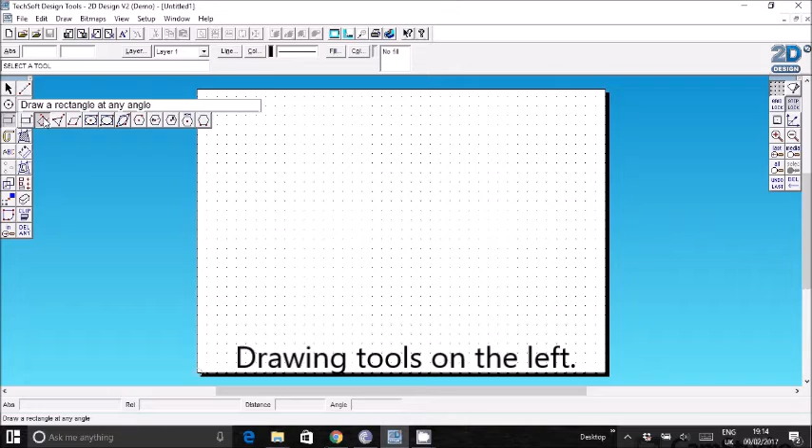Just some things I want to point out first on 2D design. On the left here is a group of drawing tools, and what you can do is you can click and then hold down, and that brings up multiple options. So for example, these are shapes. These are lines, click and hold, different ways of doing lines. This is the delete command. So most of your drawing tools are over here on the left. Over here you've got some other tools that will help you navigate.

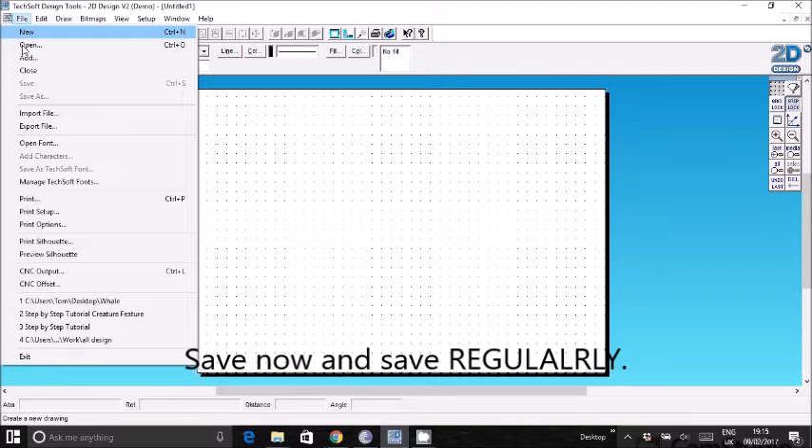Now once you've opened 2D design, it's a good idea to save your work immediately. So if you go File, Save As, and then ask where you should save your work. Okay, and you need to save regularly. Right, you've got these dots on the screen. This is your grid, and this will help you work more accurately because these are very evenly spaced.

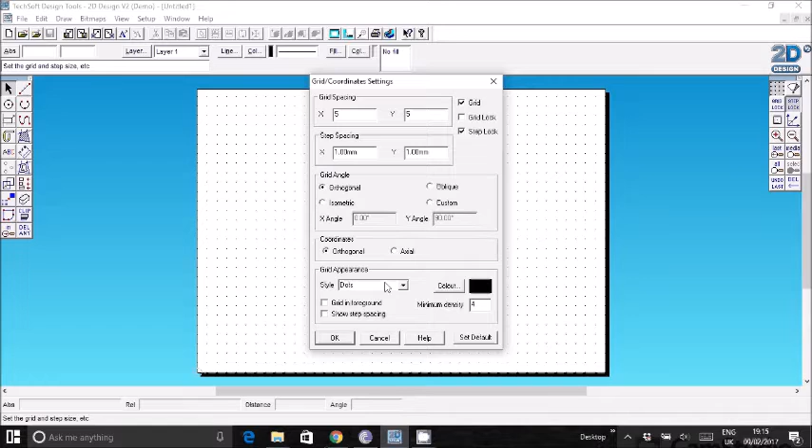Now I want to get these dots closer together. That will help me work more accurately. So the first thing you need to do is go up here to grid and double click on that. Okay, and now you're going to change the grid spacing to 5mm and 5mm, and then click OK. Now watch the dots. So they get closer together.

Excellent. Right, you also need to have grid lock on. Grid lock means that if I draw something, let's say a rectangle shape, notice that my cursor is jumping to the dots, so I know that's a very specific size. Okay, now you need to first of all draw a rectangle the size of your phone. So I'm going to give you some measurements to do.

Right, you click on shapes, and we want the first one, which is rectangle. See, you got all these options. You're going to click on the first one, rectangle. As I draw the rectangle, I want you to watch these numbers down here. See, it says rel. Yeah, watch these numbers change. So I click around here, click and then drag. You'll notice the numbers down here have changed.

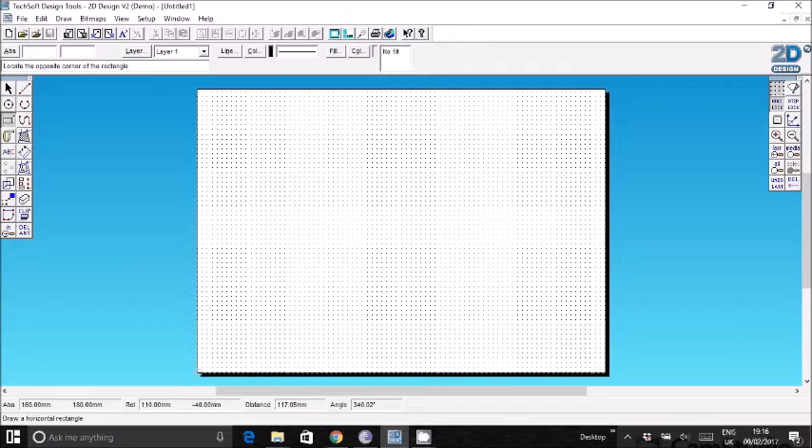Watch, and I want it to be 135 and minus 70. 135 and minus 70. That is exactly the size of my phone. So I'm going to click again now, and I've got the size of my phone.

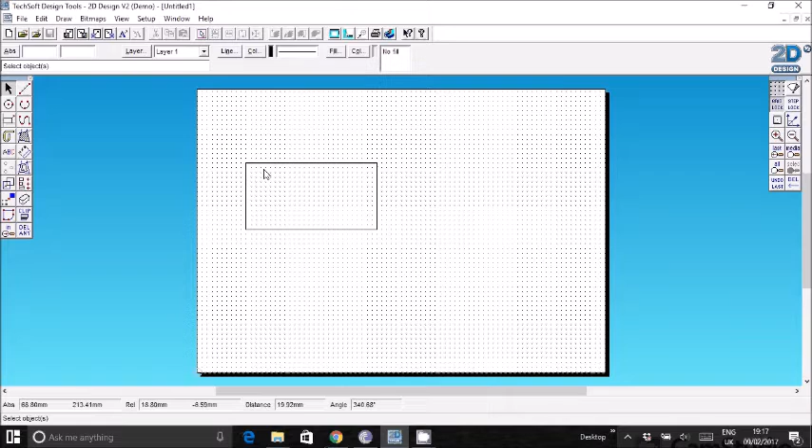Now you want the window of your phone holder to be slightly smaller. So to make a window slightly smaller than that of the phone, you need to click on this contour. So click contour, and then click 2mm. Erase that and just put 2, and then click OK. Now if I click just inside my rectangle here, there we go. That now is the window slightly smaller than my phone.

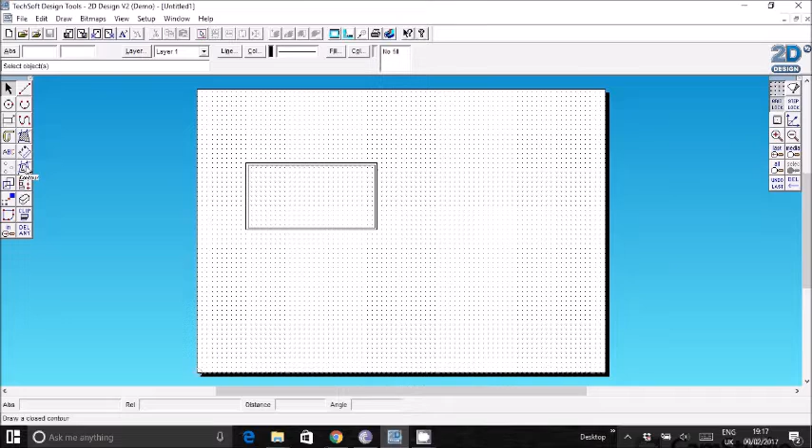Now I want to have a frame around it, so I'm going to contour again. Double click on contour, and we need to change this spacing to 15mm now, and then click OK. And again just click slightly outside the rectangle, and now we've got the window, the size of my phone, and the frame. What I'm going to do is just delete the phone now. So if I click delete any, that option, I'll just click on that. It's gone, and I've got my window and my frame.

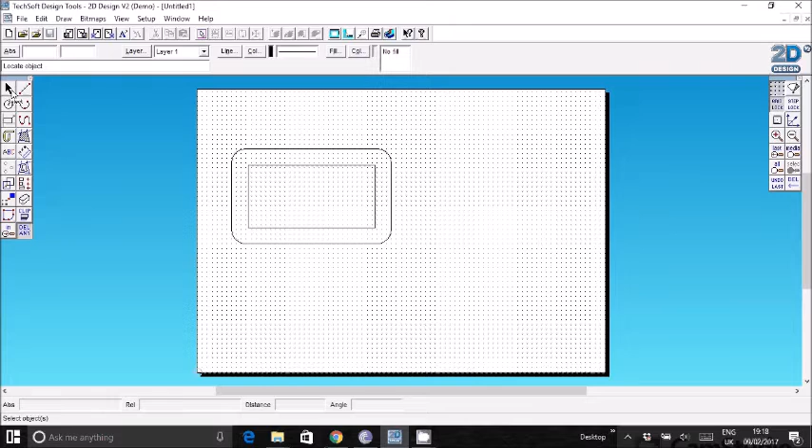Okay, it's a good idea to save now. So file and then save, or you can also click on this save icon here. Right, I'm going to move this now. If I drag over that, okay, you've got these yellow dots. This allows you to change the size. Okay, now I don't want that. If you make a mistake like that, you can just go edit, undo. So you can undo one mistake.

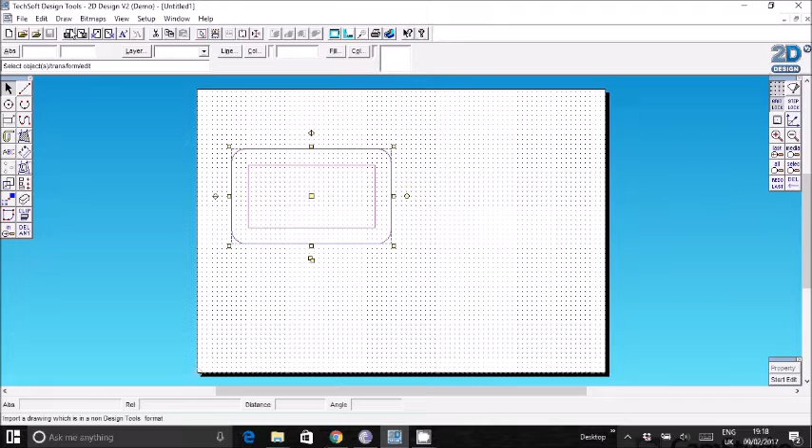What I want to do is click on this center yellow square and move it just about here, because you try and work from the top left corner.

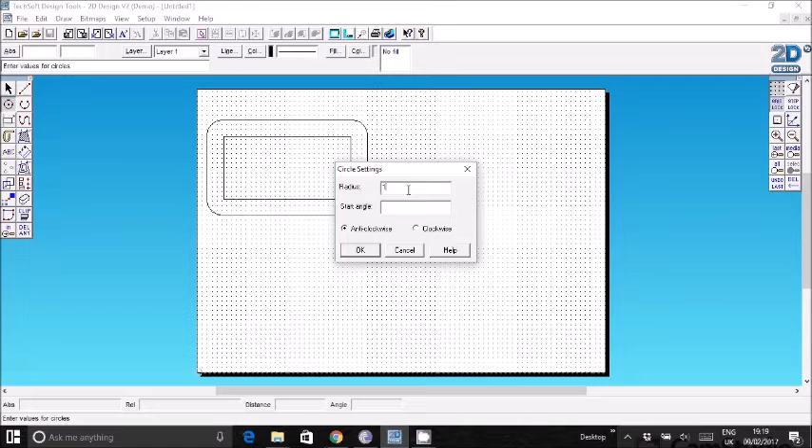Right, next step, I want to add an aerial to my TV. Now the way to do that is to first make a circle. So if you double click on circle, and I want you to set a radius of let's say 15 millimeters, that is radius, and then click OK.

Then you've got that circle. I want you to place it approximately there, and then click again. Right, now I'm going to delete these lines I don't want. So to do that, I click on delete any, hold it down, and then select this second option here.

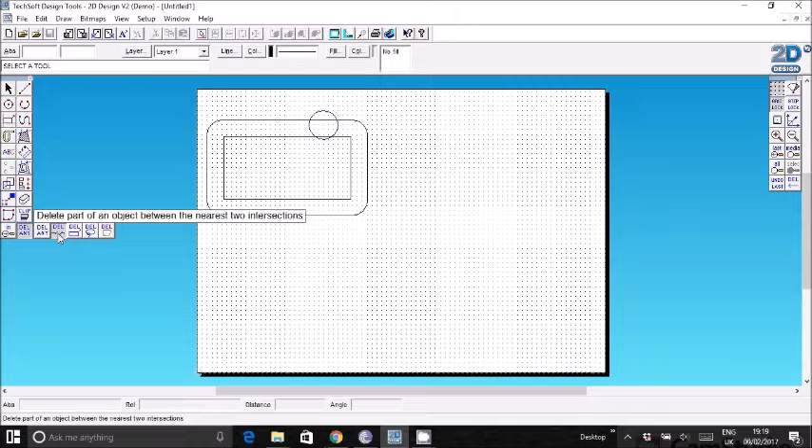Now if I zoom in using this tool here, zoom, scroll up and across, I can delete these lines I don't want. I don't want that, don't want that, don't want that, I don't want that. Okay, great. I'm going to save that now, so you can click there, save, or file, save.

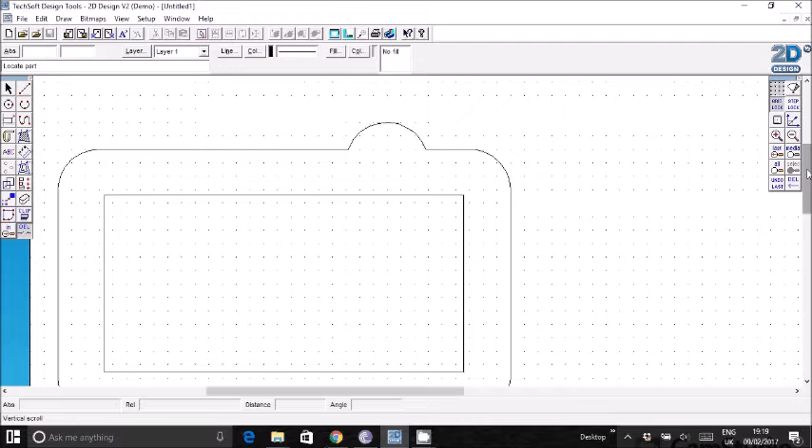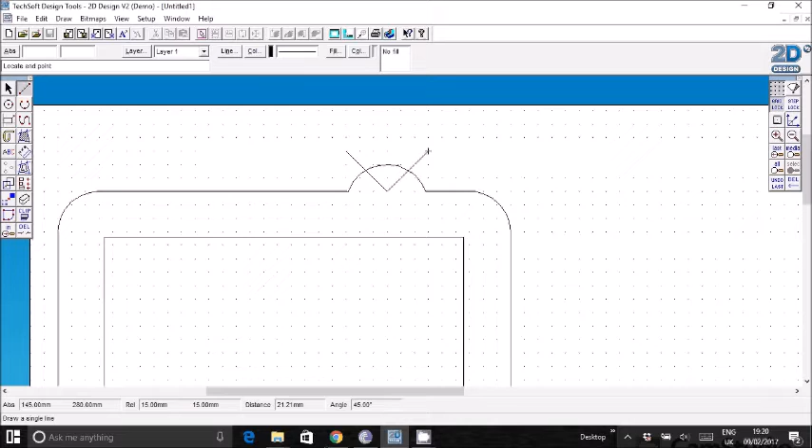Now I want to add the aerials just above, so what I can do is, if I click circle, oh no, before I do that, I'm going to have lines. Click line here, and I want a line coming out like this, let's say to that point, and I want a line coming out there to that point. Notice it's even, yeah, it's even.

Now I want some small circles on the end, so I'm going to click circle, and I click on the end of my line, and I'm just going to do it that size. And I'm also going to do one here, click and then click again. Now the laser cutter will just cut through that, and I don't want that, I need some thickness here.

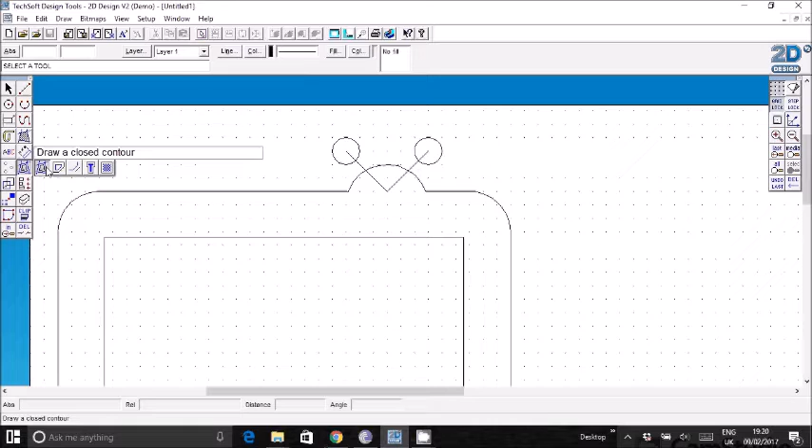So what I'm going to do is click contour, and this time I'm going to select this third option here. I'm going to change that spacing to 3mm. Let's see if that works. Now if I zoom in again, and then click this side of the line, and then that side of the line, I'll do the same here, there, and there. This is starting to take shape now.

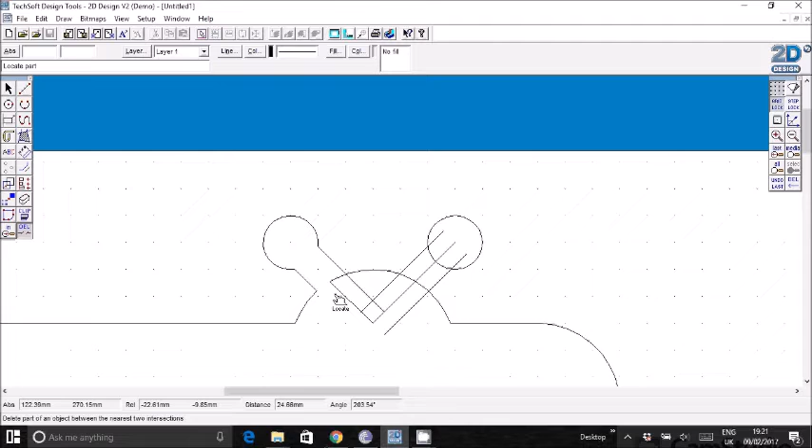And now I need to delete the lines I don't want. So I'm going to click delete any again, which is the delete part of an object, which is the second option here. I'm just going to delete all the lines I don't want, which is all of these. That one. Same over here. If you make a mistake, again, just edit, undo. Okay, I need to keep deleting.

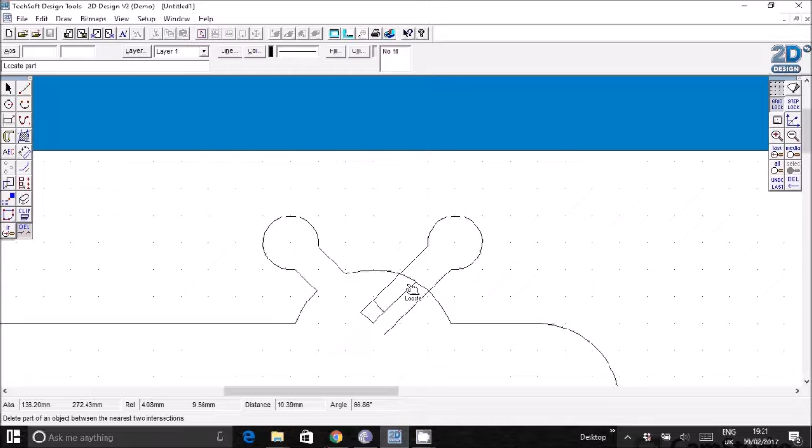Oops. And now for those items that are left, I'm just going to select them all and then delete. Press delete. Okay, if you zoom out, that kind of looks like a TV aerial, doesn't it? Right, good stuff. Now I want to add some feet to my TV.

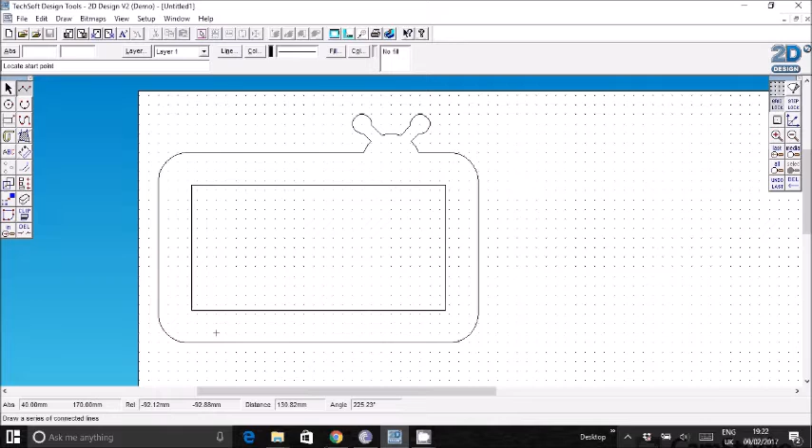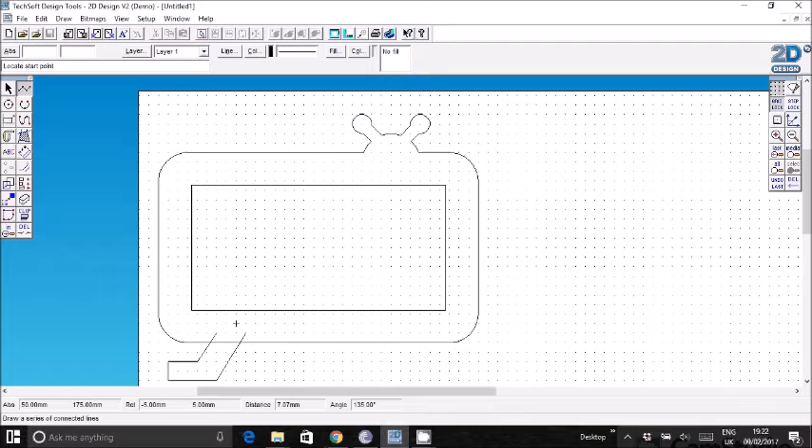So what I'm going to do is use the line tool. If you click line and then click this second option, draw a series of connected lines. What I'm going to do is start here, click, and then go down. And I'm going to keep drawing by clicking, like that. Okay, there's one foot. Now, if you've then still got this line selected, if you just right click, it finishes. Now I need to delete the bits I don't want again, so delete, delete, and delete.

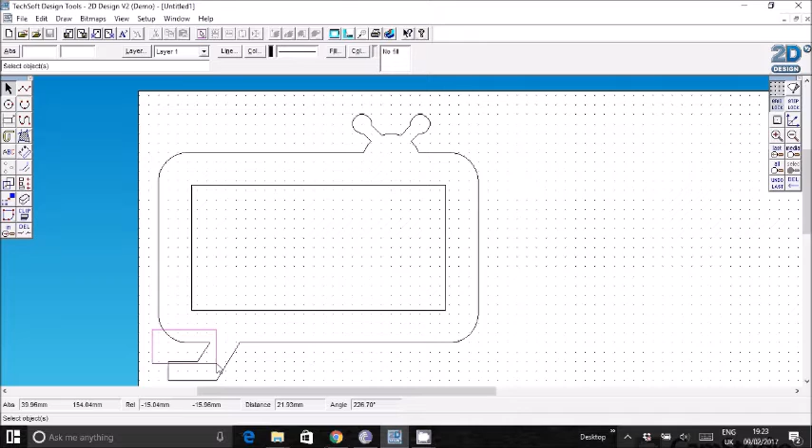Right, I've got that one foot, happy with that, but I want this replicated on the other side, and I want it to be exact. Now the way to do that, if I click that, the cursor, and then highlight everything, and then I do what we call mirror. So if you go draw, and then you go transform, and you click mirror, you're going to repeat, so click repeat.

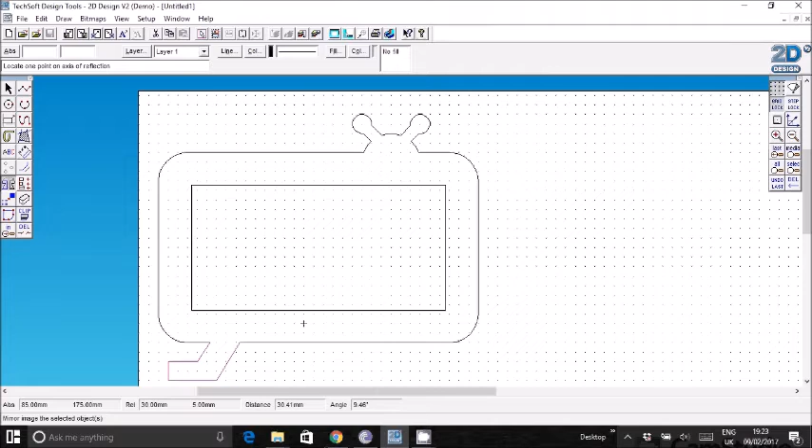Okay, now I need to draw a line, an imaginary mirror. So I'm going to imagine my mirror is probably about there, isn't it? Imagine that's my mirror. I click, boom. Right, that is exactly the same, but it needs to be further to the right. So I'm going to drag over everything again, and I click this center yellow, and I'm going to drag this to there. That looks better.

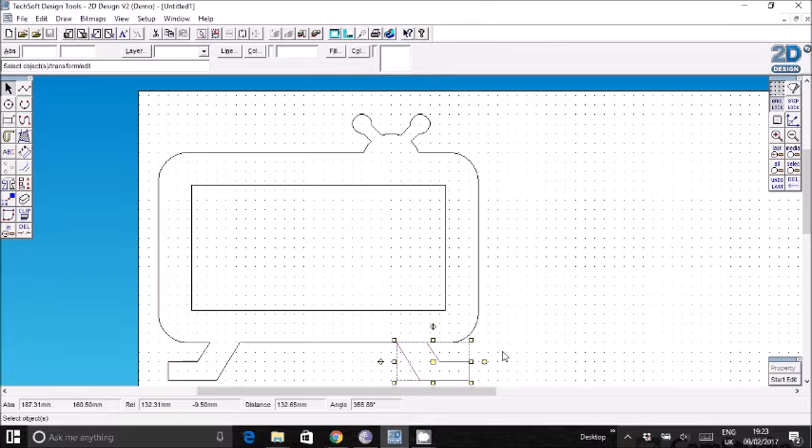Now the laser cutter will cut anything in black. So this bit here, if the laser cutter went through that, it would chop my foot off. So I just need to delete that little line there. Alright, good. Right, my frame is basically finished. I'm going to save that. File, save. Okay.

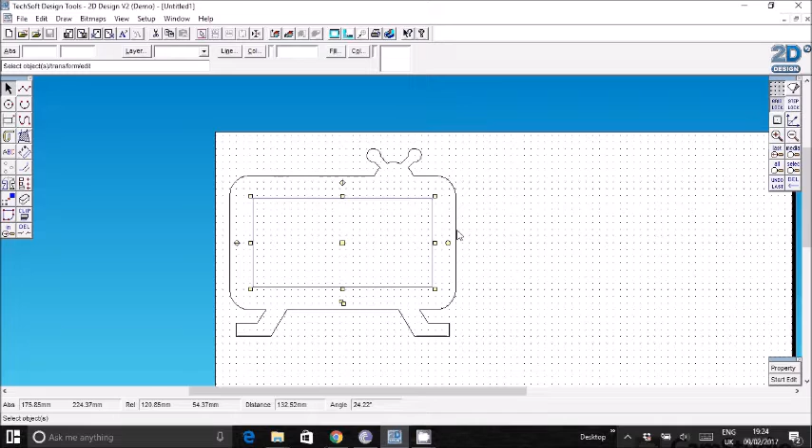And keep on saving. Now the next step, these are all a series of individual non-connected lines, and I want this to be one object. So what I'm going to do is drag over everything like that, and group them. You do that by clicking edit and then group. Okay, now if I click, it highlights everything.

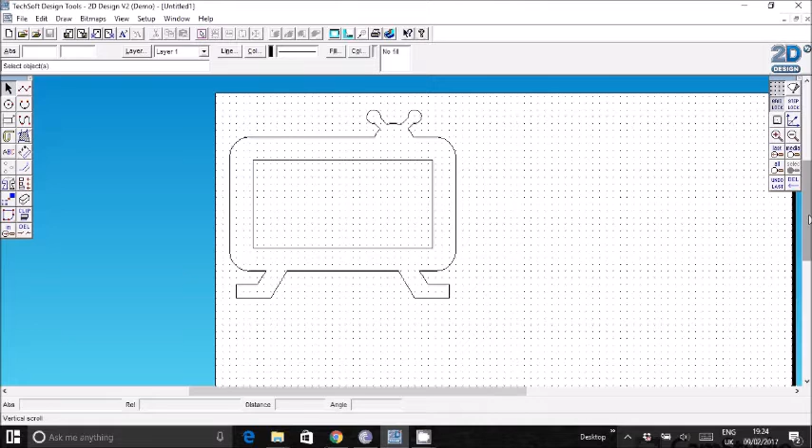Great, now that's the front of your phone holder. You also need a back. To make the back, click on the object, and down here you've got two yellow squares. Click that and it copies it. So I've got a copy, and I'm just going to click on the middle yellow square again and move this copy over here. Okay, so two exact replicas of the frame.

Now the back is half the height, so what you need to do is click a line. I'm going to draw a single line here, and across the middle I'm just going to click there and drag it across, click there. Now the back is only half the height and it doesn't have any detail, so what you need to do now is just delete anything above that line.

You also need to delete these internal bits. Okay, now if I click on that, I want to delete these top bits, but I want to keep this bottom bit, so I'm going to have to ungroup it. If I click on that and then edit and then ungroup, it's gone from one object to being a series of lines again.

So I'm going to select all of that and just delete, pressing the delete key to do that, and then if you select over everything, we're going to group that again. Edit, group. Okay, I'm going to save that, click here, or file save, and keep doing it regularly. So now I've got the frame and the back of my phone holder.

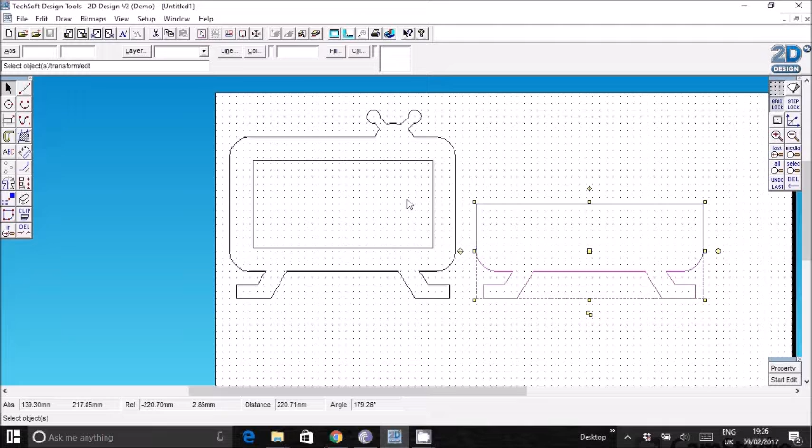Now the next thing you need to do is add some lines in the middle, because you need some sections which are going to keep the front and the back apart. To do that, you're going to click line, and draw across the bottom of your window here like that. Now if I zoom in,

you see these lines stick out. I don't want that, so I'm just going to delete part of this item here.

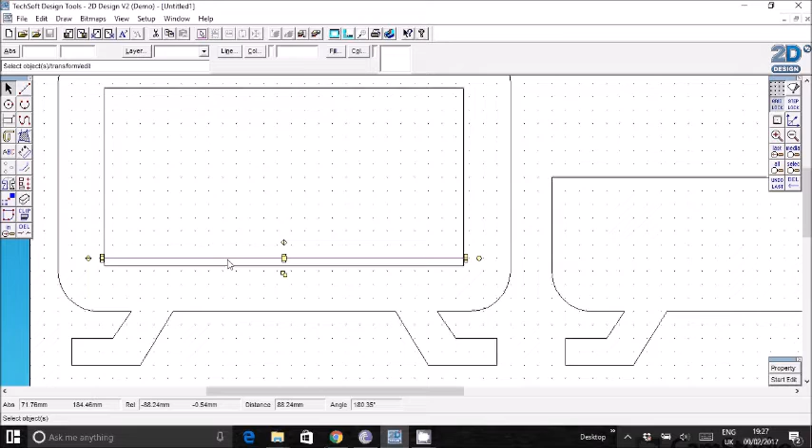Now I want to copy this multiple times, and they need to be evenly spaced. So what I'm going to do is click on that line, and there's a tool. If you go edit, then transform, and we're going to move/copy. Okay, move copy. Now I'm going to repeat this - let's try 6 times. So repeat 6 times and then click OK.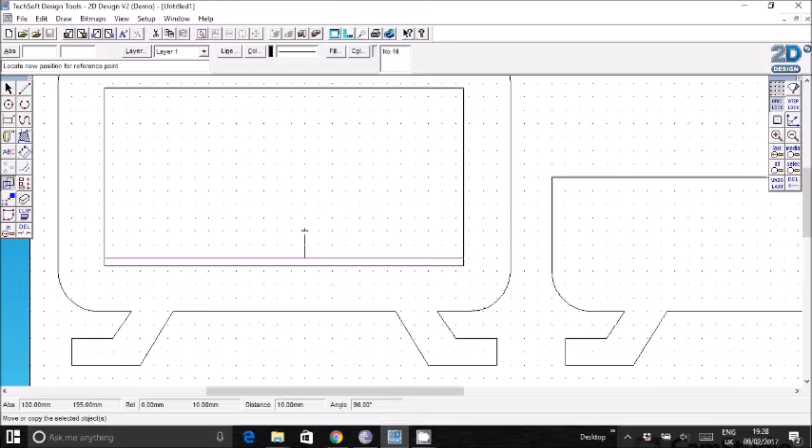Now if I click on the line, then move up, I'll go 2 dots, which is 10 millimeters, and then click again. It's duplicated that, and they're all evenly spaced, which is what I wanted. Okay, so a few of these will be the bottom section in between the front and back.

I also need some side pieces, so what I'm going to do is click on line again. Let's say if I count the dots here, well, I'm going to draw a line here first, like that. Now I'm going to count the dots. What do I need to do? No, I need to copy it again.

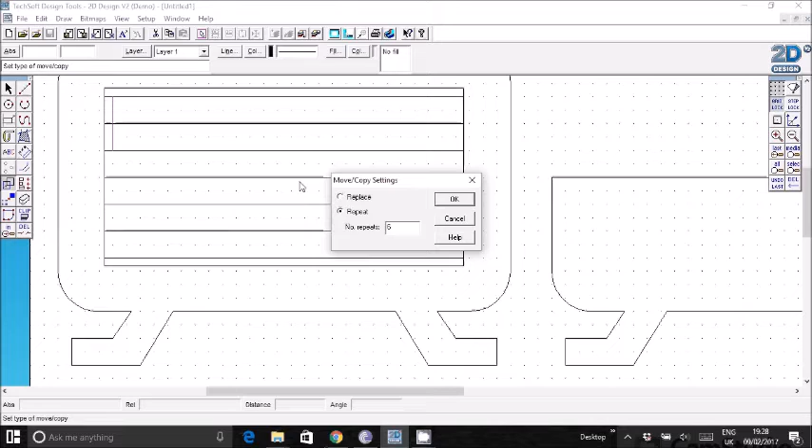So I click on this line, and then draw, transform, move copy again. And we're going to repeat it - let's try 6 times again. Now if I click on the line here, this time we're going to move it 1, 2, 3, 4 dots. Let's try 5 dots. Let's see what happens. Click.

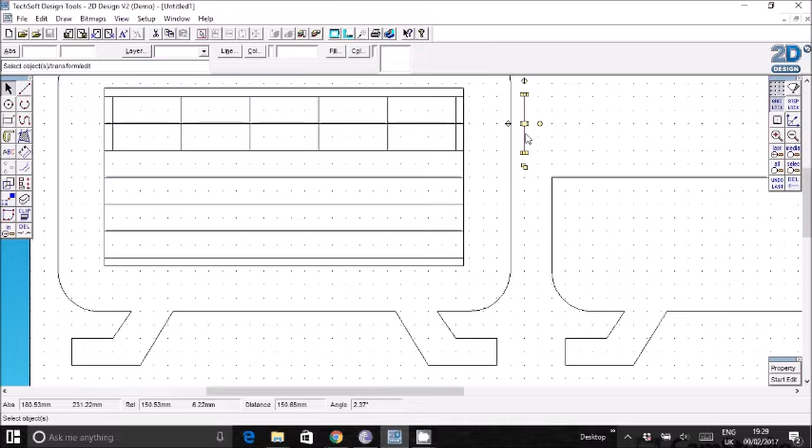Beautiful. Now I've got one line over here I don't want, so I'm just going to click on that and delete it. Now these will be my side pieces. Okay, let's zoom out again. Again, it's a good idea to save here. Beautiful, so I've got the front, the back, and these in between parts.

The last thing you need to do is add some triangles for the base, for the back of your phone holder. The way to do that, if you click on shapes, click and hold, and then select the triangle option.

Watch these rel numbers here, they'll tell you the size of the triangle you're drawing. So I click... escape, try again, give myself more space. You want it about 35mm down and about 30 across.

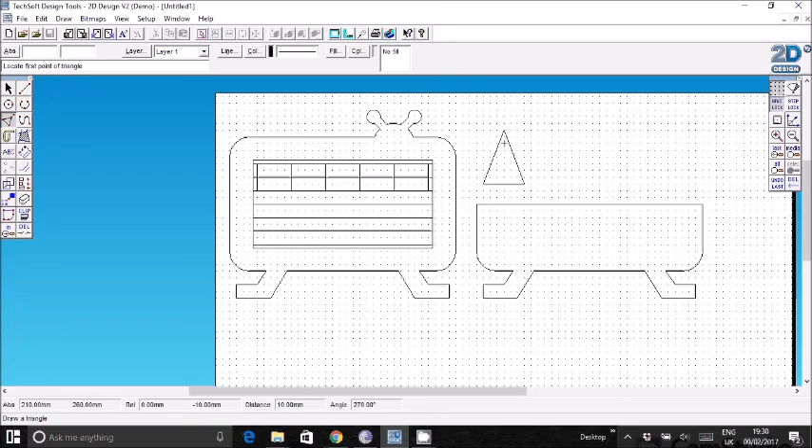Actually, let's make it bigger. Let's try 40 down. Oh, what am I doing? Once more, again looking at the rel numbers here. We'll go 40 down and to the side, and we're going to go 30 across. See my rel numbers at the bottom left? That's 30 down, 40 down, and that's 30 across.

That's one triangle. What I'm going to do is click and then copy that, and these are the back pieces that will hold your phone up.

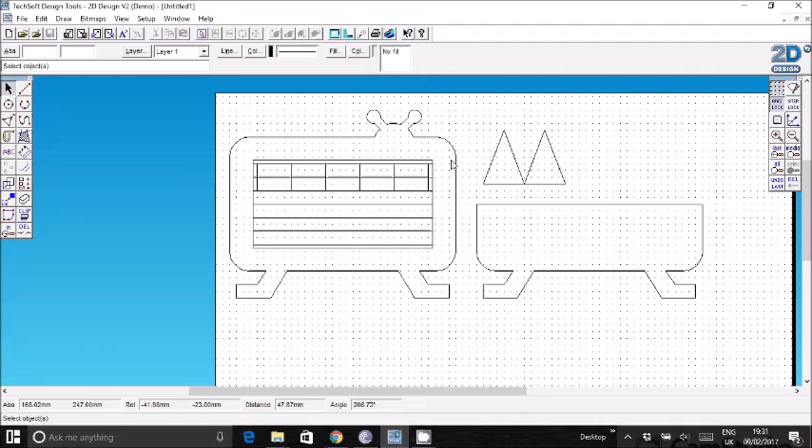In fact, we're going to make more than that. I'll tell you what we'll do. If we copy it again, move this, and then copy it again.

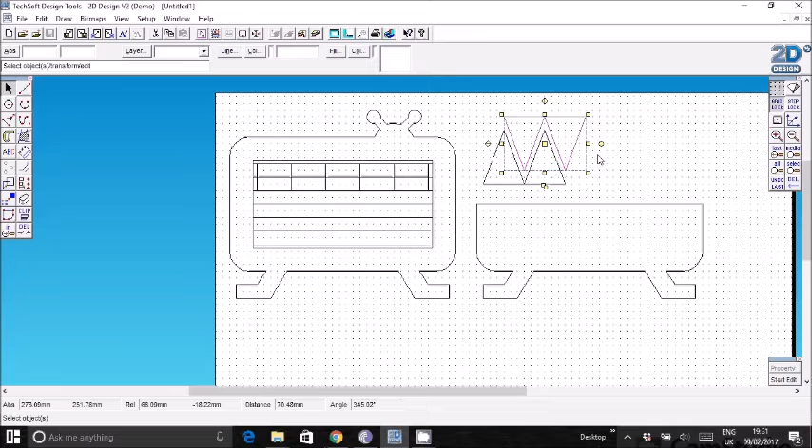Now to save space, if I highlight these two, and then click this object here, it flips it, and then I can actually move this within the area of the other two, so when I laser cut, I'm saving material and saving space.

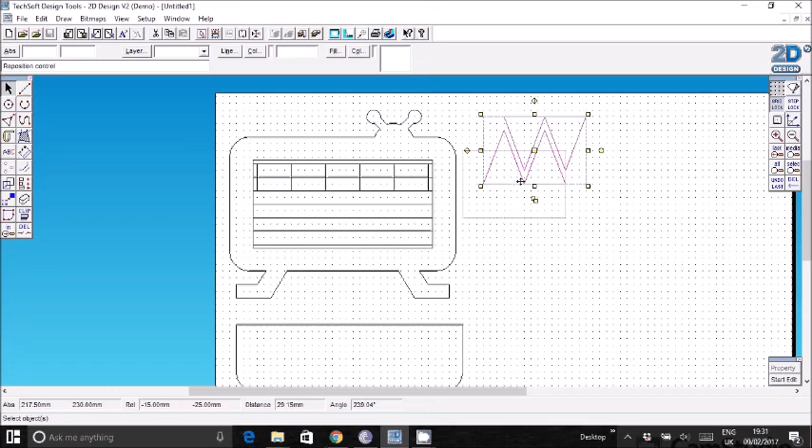Excellent, you've basically finished. All I would do before we laser cut is put these in a space where they're not going to waste lots of plastic. Move it up closer together, and you are ready to laser cut. Well done.

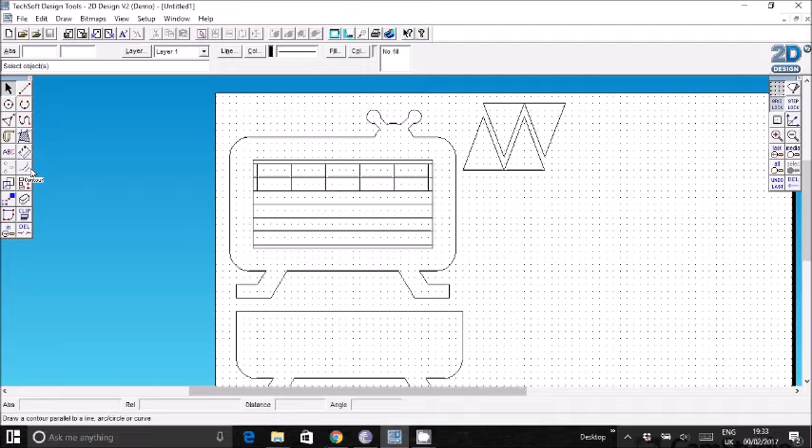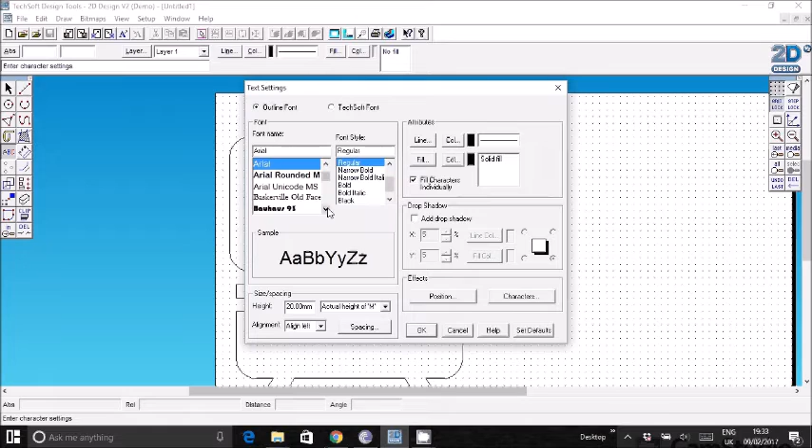Okay, just some other points worth making. If you want to add some details, you can do things like adding words if you click on ABC. So if I click ABC there, and then anywhere really, I can type a message. For example, let's say 'Steven's phone,' and I can click settings, which allows me to change my font. So I'm going to click, say, Bauhaus—that's a nice font—and then OK and OK.

Again, you can use these yellow grip points to change the size that you want. Now when you do this, you might want to turn grid lock off, so I'll show you that. Grid lock off gives you more flexibility.

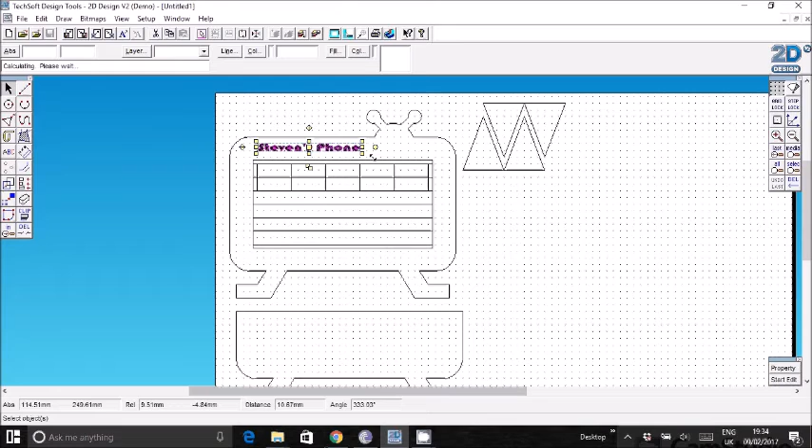Now the laser cutter will cut anything in black, and we don't want that cut out. So what you have to do is click fill up here and no fill, so the black goes. We also have to change the line color—this needs to be red now. So if we click line here, it says Col. Click on that, then we can change that color to red. This one down here, and OK.

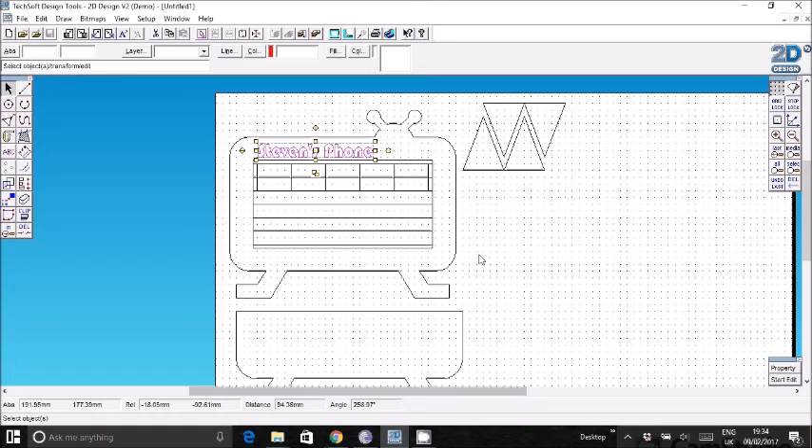You see that now will just lightly engrave on the plastic and not cut all the way through. You might want to add some features—for example, over here I might want a small button, so I could draw a little circle here, and I could draw a series of lines as if, let's say, there was a speaker with noise coming out of the TV. Maybe I want the same over here.

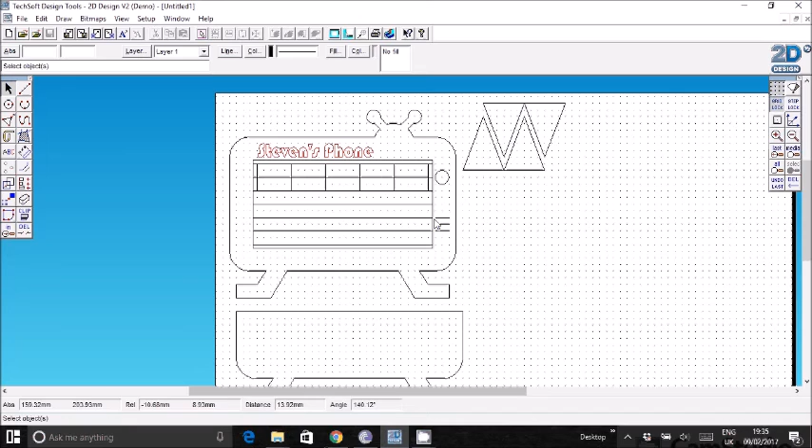Well, there's an easy way of doing this. If I just highlight them and then copy by clicking that, I can just move these lines to the same place on the opposite side.

Now remember, these things are going to be engraved, so what I have to do is change the color. If you want to highlight a number of things, press the Shift key, and then you can select a number of things at the same time. And you need to click Col here, line color, and then red.

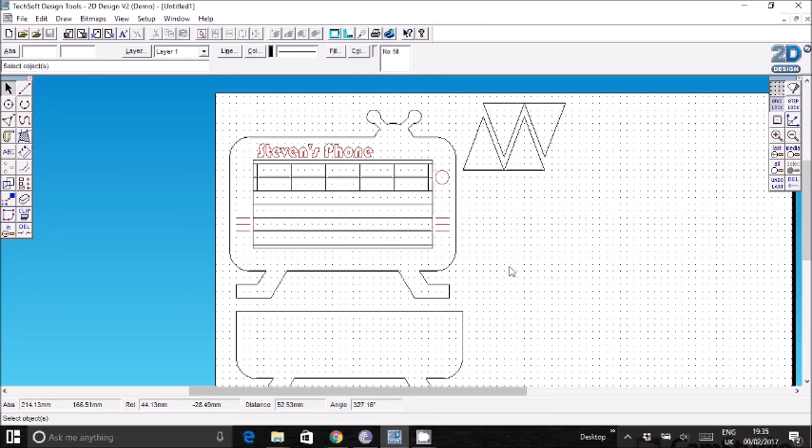So that's just adding a few little details. There's loads of little things you can do, like for example this curved line. So if I turn grid lock off to help me do this, you might want a nice curvy shape depending on what your design is.

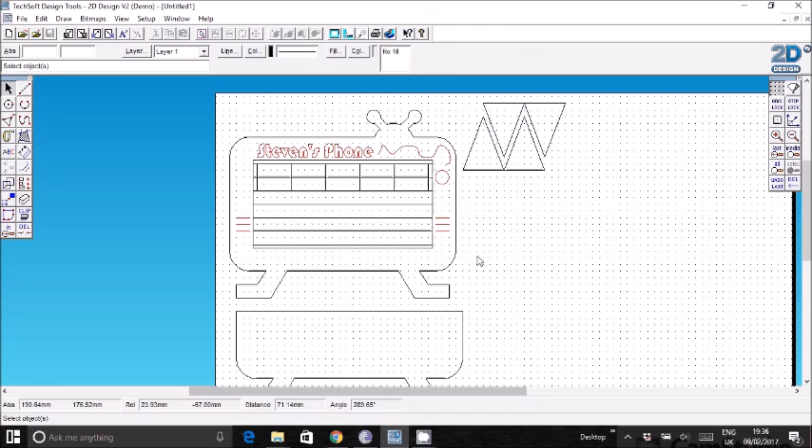When you're happy with your lines, you can just right click, and there you go again. So make sure it cuts properly, that it engraves properly, that needs to be red. Okay, right, give it a go, see how you get on.